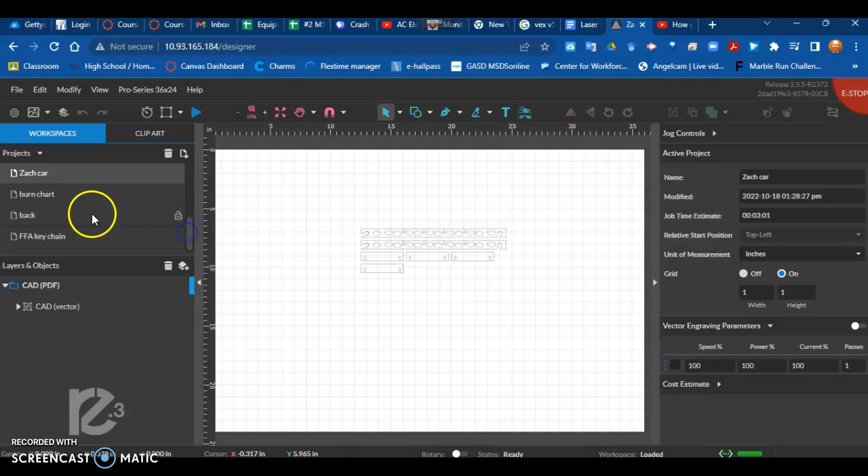Here in our lab, we have a policy where we clear out the day's work. All these files up here I'm going to end up trashing at the end of the day. So it's important that you have your file to come back to, especially if you've been working on your settings, your vector power settings. You can load all those things back in.

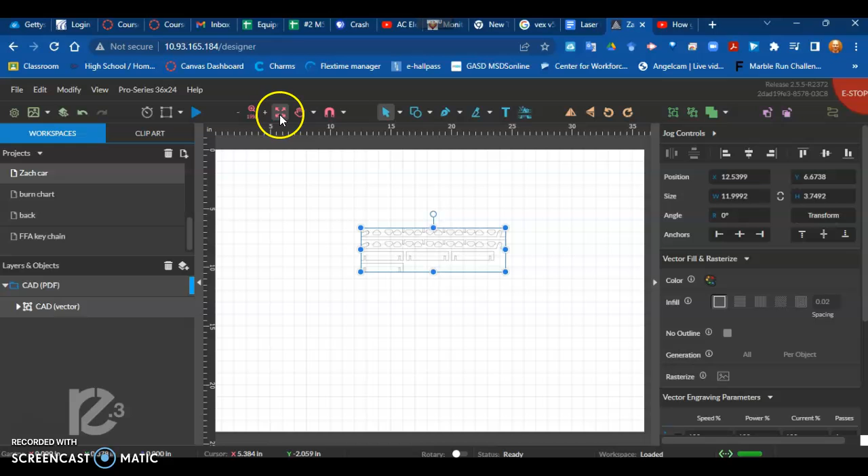So what we have here is a student's project where he created a CAD file and brought it in for his mousetrap car. When I do fit all, it shows me the entire screen of that project. I'm going to zoom in just so you can see what he was doing. So this was a project where he made his frame rails and some locking members for his mousetrap car chassis.

This was all cut as a vector. He had a single pass at 100 and 100 on Baltic birch plywood. Let's say that after he's cut this, he's going to make some adjustments to this particular project, and he wants to open this file back up so he doesn't lose his work.

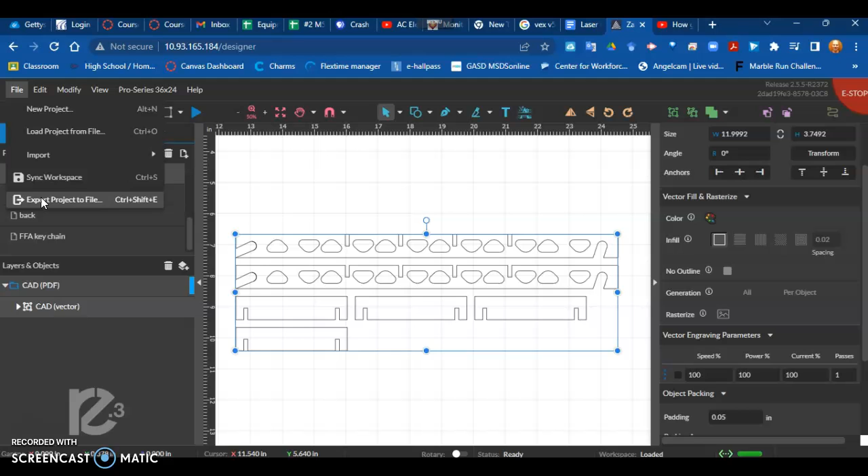We want to export this. Come up here to File, and you're going to export this project to File. A Control-Shift-E will do the same thing - Control-Shift Export, or File, Export Project to File, the very last option there. So select Export to File.

We're going to take this to Zach's workspace. So you want to go into the TechEd Share, then go to your student folder. Go to Students, go to S1, go to your teacher's folder and the class you're in, and you're going to find your particular student's folder. So this is Zach Sense's project. We're going to take that file - it creates an RE3 file - and save that there in that folder.

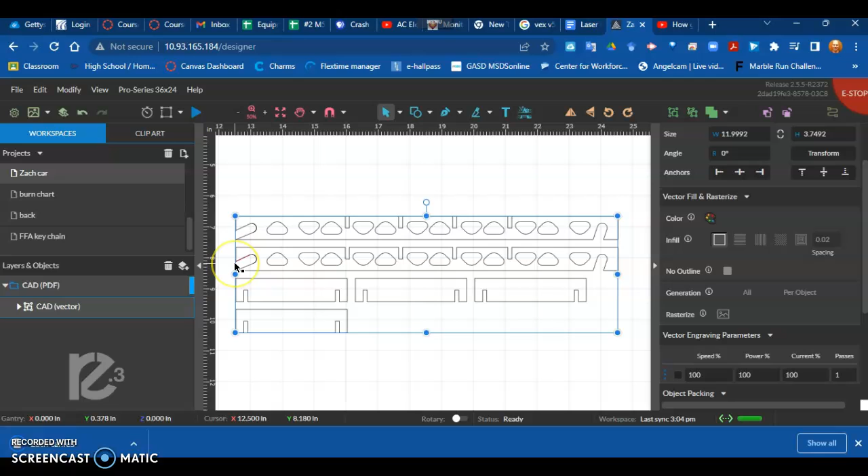So it's that easy. That way, at the end of the day, when I go and delete this project, and this project, and this project, all these projects are being deleted at the end of the day. That way, when you come back onto the machine another day, you can load your project back in.

To load the project, you make a connection through the internet IP address. Log in, open the RE3 Designer interface, come up to File, and you're going to load a project from File. So load from File, and we're going to navigate back to that same folder that I just saved it in - we need to go to TechEd.

We're going down to Students, S1, teacher's name, course's name, your name, and there's Zach's RE3. I open that, and that will import the file - and here we are. All his settings are there, and he's ready to go and work.

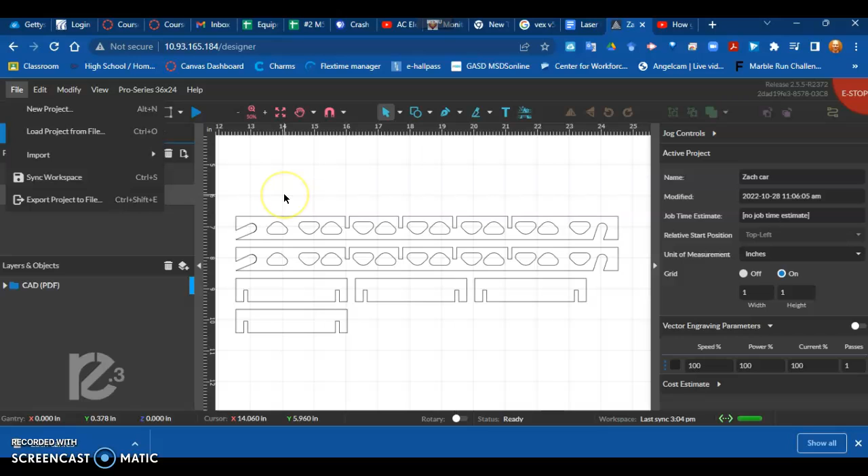Very, very important: after you use the laser, please make sure you export to file, or you may lose your work and have to start all over again. So hopefully you also have your drawings backed up somewhere else. This is especially critical if you use this interface to design your work. If all your design work is done on this interface, please make sure you export your file, because at the end of the day, we are going to be clearing the laser's memory of your project.